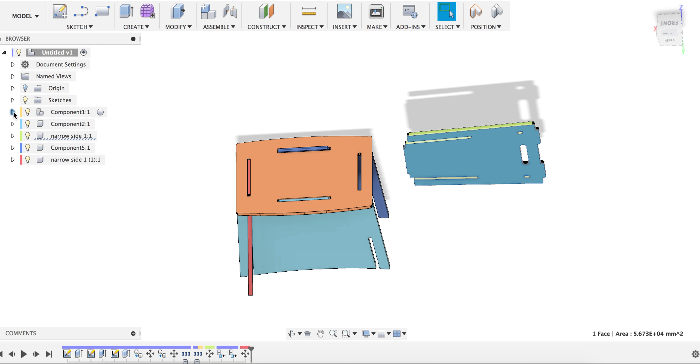One thing I did to simplify this for myself: I didn't use any joints. I just took each piece, each body that I had—you'll see bodies over here—and I would click on a body, or go to Assemble and hit New Component, then hit From Bodies, and select one of my bodies. Then it would make it into a component.

Now my components are all color coordinated here. When I click on my component, I can then move it around. Essentially all I've done is just moved each of these components into the place where they need to be. They're not really joined or anything, but you can kind of see it coming together.

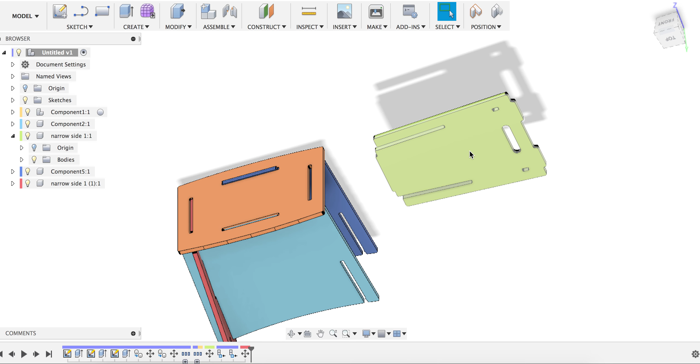I might need to rotate this blue piece a little bit. But then with this component, I'll click on here and just go to Move, and it'll give me controls where I can shift everything around.

Let's see if I can try to fit this last piece in. So I might use this, straighten it up, and bring it around, then press Enter, and then I can select that and should be able to move it.

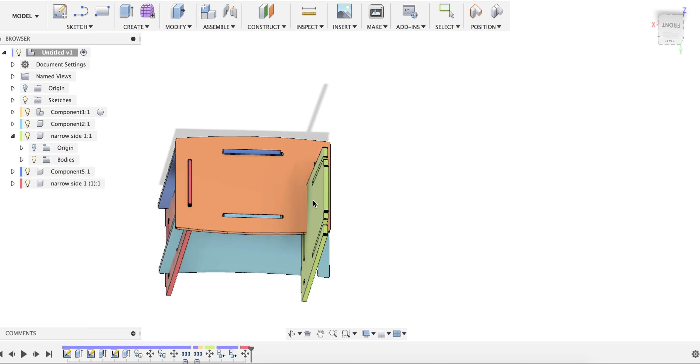Basically I'm just using the— gosh, what is this called—the control to make sure I get this as close as possible. It takes a little bit of practice, making sure your X, Y, and Z axis, everything is correct. This kind of simplified it for me.

The ultimate goal of this is to form an isometric view of your product. So if you're moving each component into place relative to each other, for the most part that should accomplish the task. This last piece here—

I'll have to just focus on getting the angle correct. Let's see. I can go to move it here.

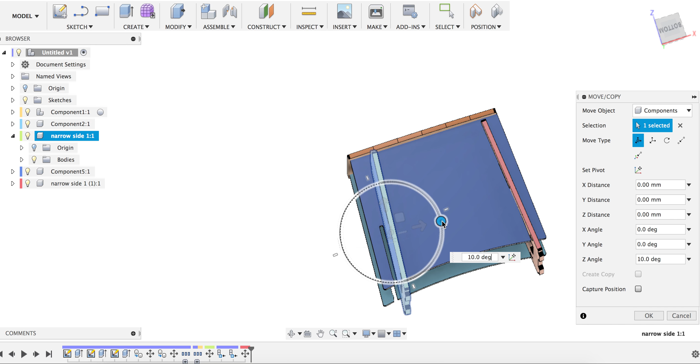Let's see this change. Then it's just kind of going back around and checking to make sure I can get them as close as possible.

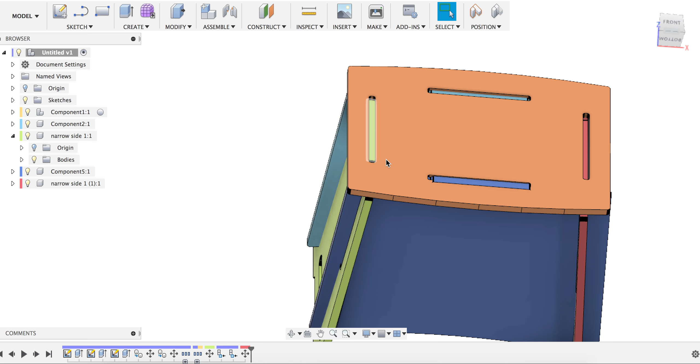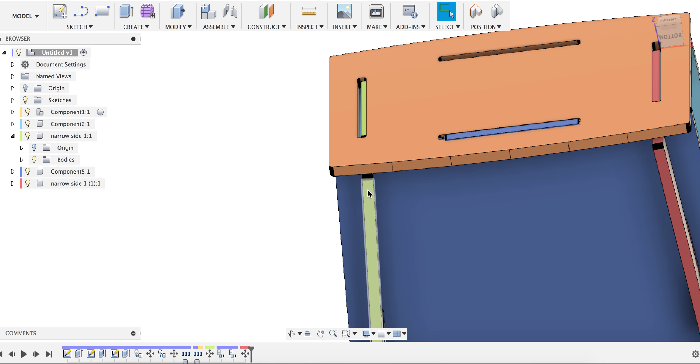Yeah, I'm still working on figuring out how to create joints. I might get to that, but I wanted to show you an alternative to something you can do—just moving the actual components themselves. I still need to fix this, but that'll allow you to have your isometric view. I'm going to have to change this angle a little bit.

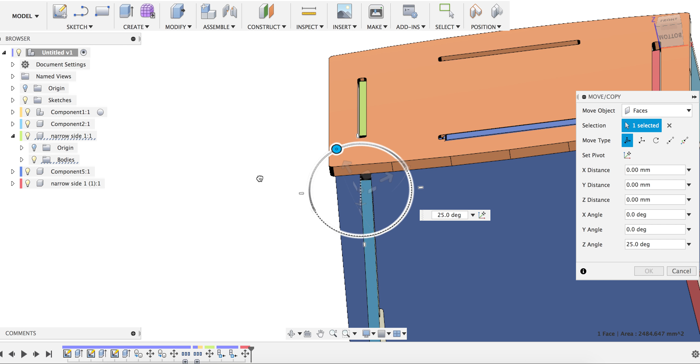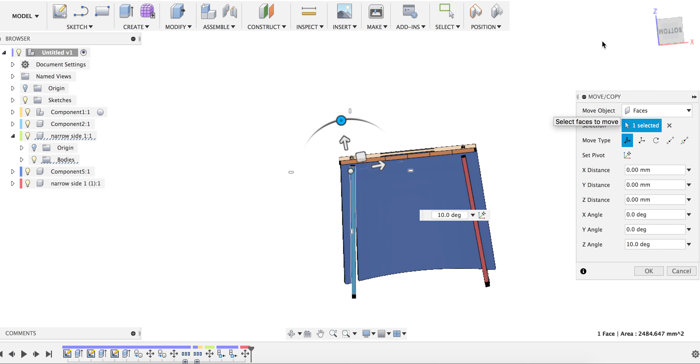Which, you know, it's not perfect, but it gets pretty close. Then what I would probably do next is take screenshots of this model, and you'll use this for your isometric view of your product.

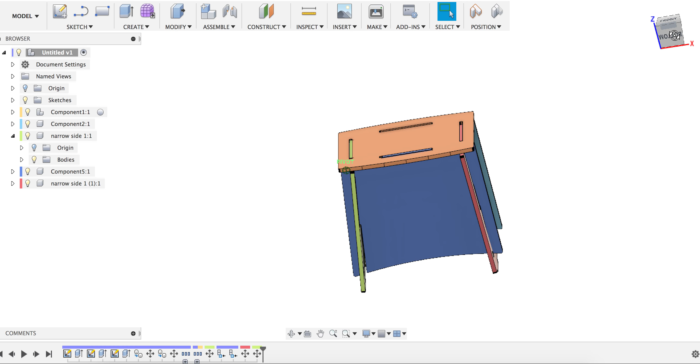Let's see. If you're able to use the assembly and create joints, then fantastic. But since we're a little bit on a time crunch here, I could also give you this option.

Let's see. Yeah, there's still some issues with the large wide side. But you get the idea.